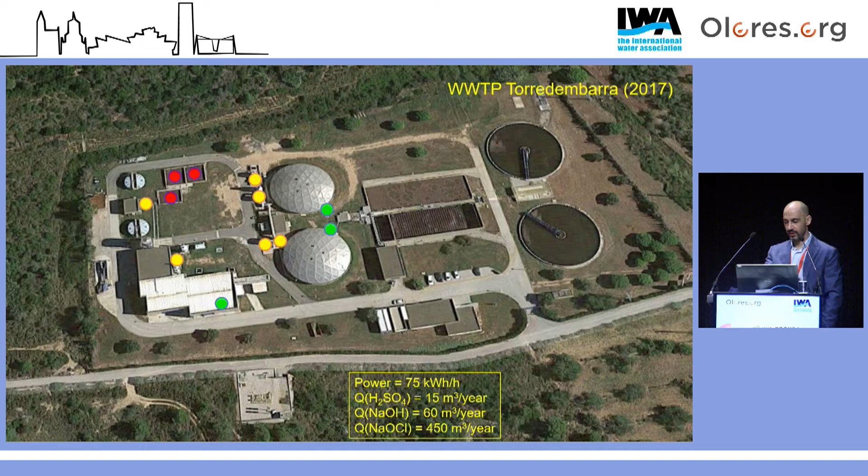And the consumption of chemicals was quite high: 15 cubic meters a year of sulfuric acid, around 60 cubic meters a year of caustic, and around 450 cubic meters a year of bleach. So you can imagine that the cost was pretty high. So the operating entity and the Catalan administration contacted Aeris, first of all, to perform an assessment of the situation of the plant.

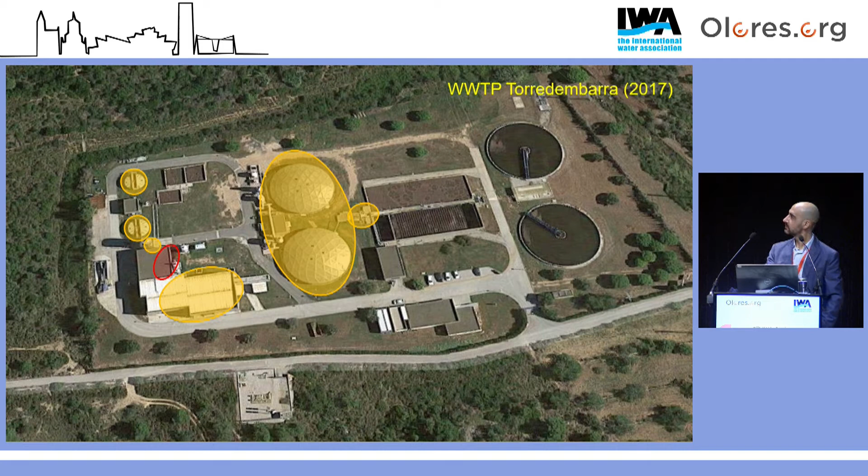First of all, we did a study on which were the main areas in the plant in which odors were produced. And we saw nothing really special here. The main problems were in the pretreatment, in the primary settlers, there on the right, and in the sludge management area, with special emphasis on the dewatering building. So that's when the optimization of the plant begins.

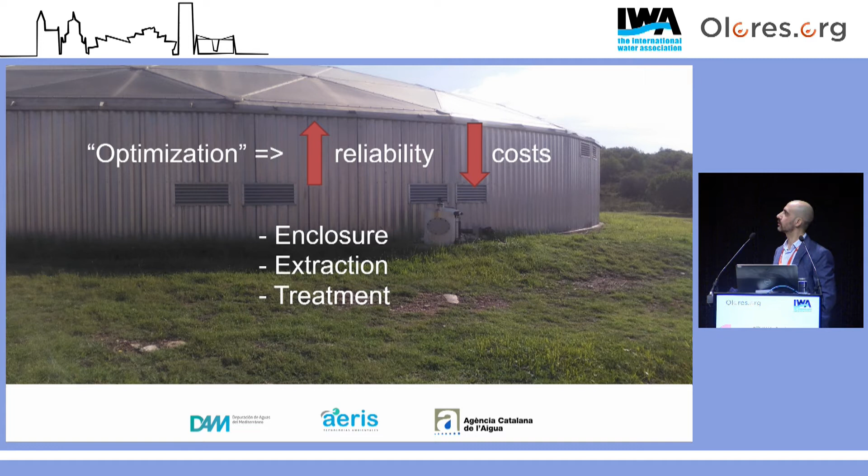Again, the objective of this work was to increase the reliability of the deodorization while at the same time trying to decrease the costs. We did that by acting in 3 different directions: by optimizing the enclosure, the extraction of the foul air, and finally the treatment of the air.

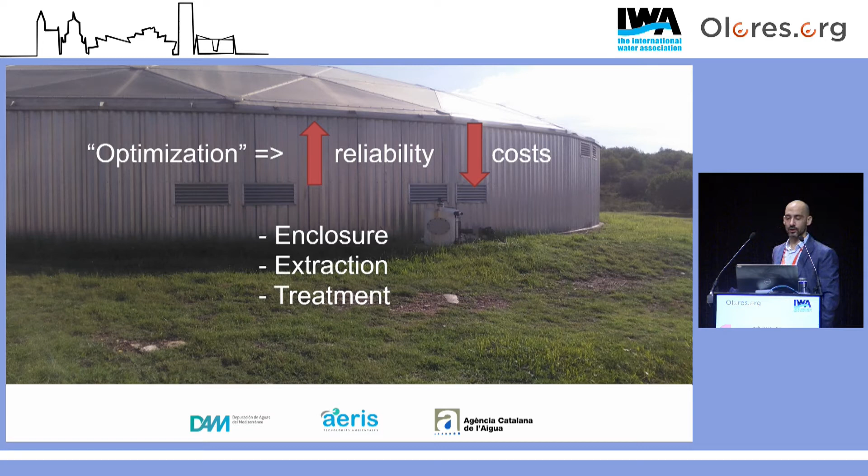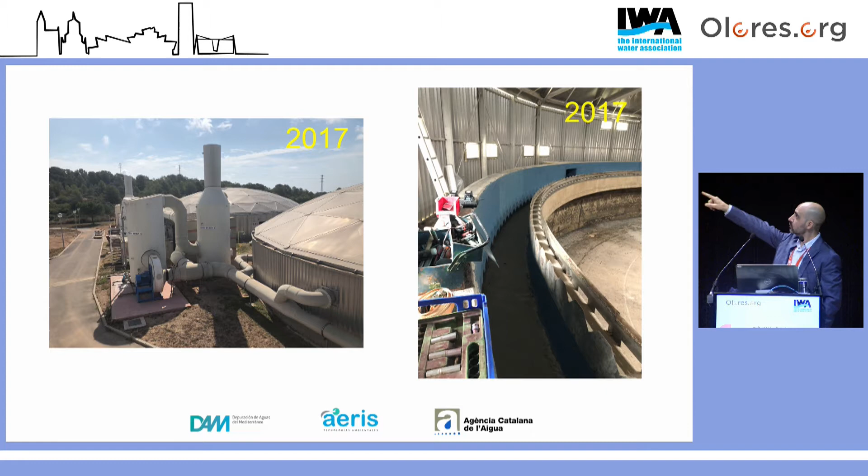First of all, regarding the enclosure of the systems, you can see the situation of the primary settlers before any actuation was done. These were covered by these fancy domes there, really nice, but each of these contained around 3,000 cubic meters of air. So it's a huge amount of air that you need to pump and treat. Also, the outlet ring of the settler was open, exposed.

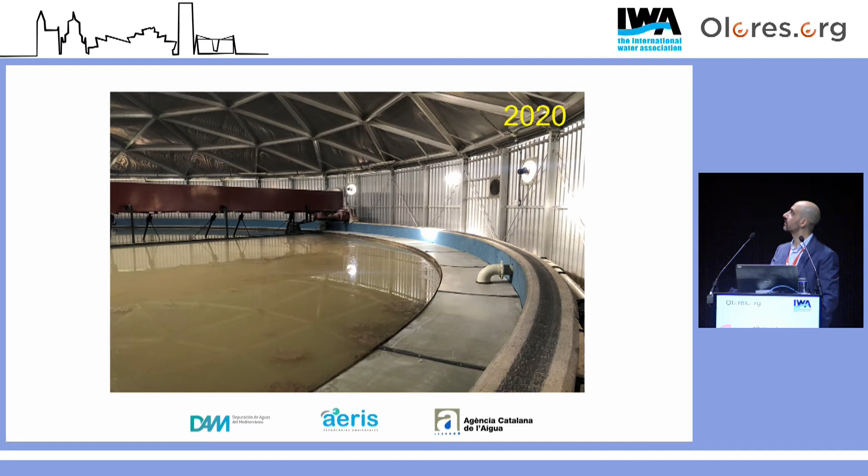So the first thing that was done here was to cover these outlet rings and to include there some extracting fans for the ambient air. Similarly, this is the state of the grit chamber before the actuations. You can see that it was open, and these were closed.

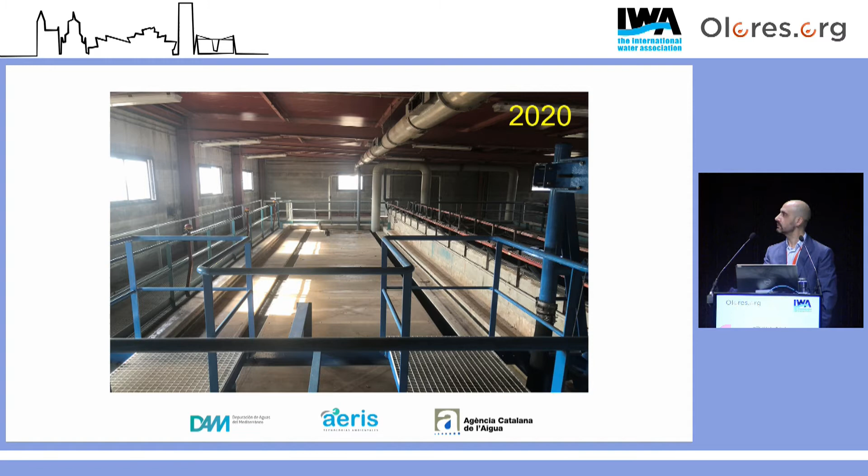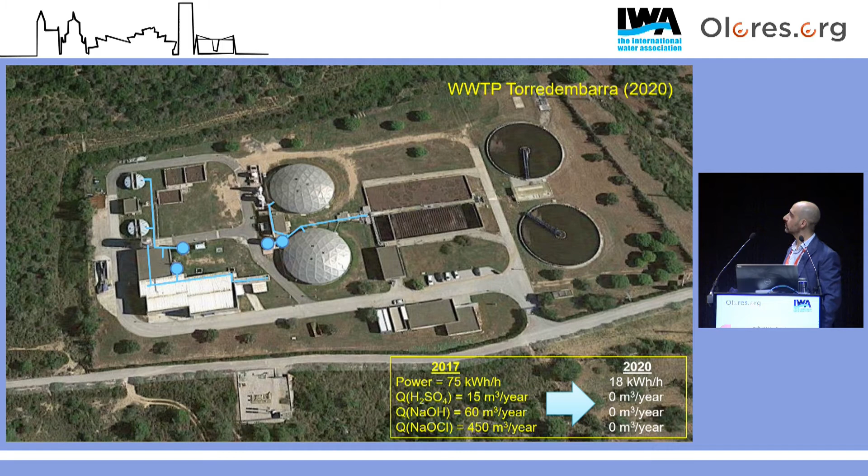So, the actions that were made here led to a decrease in the power consumption around 4-fold, and no more chemicals needed to be used. And now I will tell you about what we did on each of these areas. This is area 1, giving service to the dewatering building and to the thickeners.

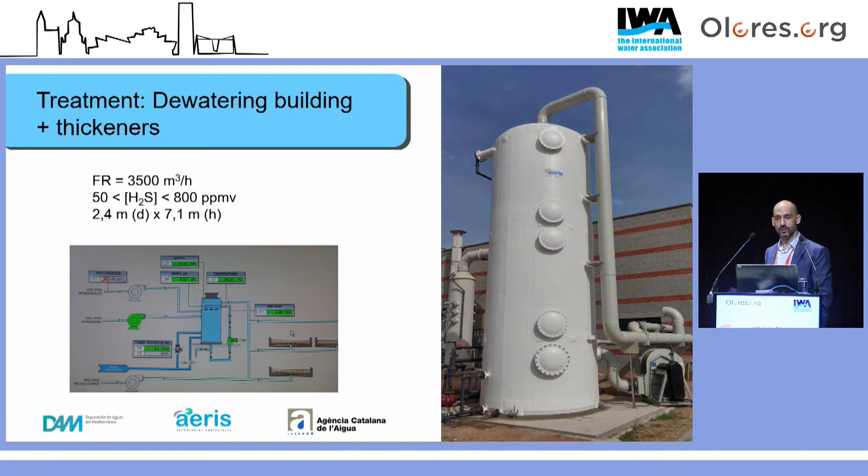Here what we did was to design and to implement a biotrickling filter for treating around 3,500 cubic meters an hour of foul air, which had a very variable but also very high concentration of H2S, reaching up to 800 ppm. So here you can see the results. These are data from this same summer. We're seeing 4 months of operation of the system.

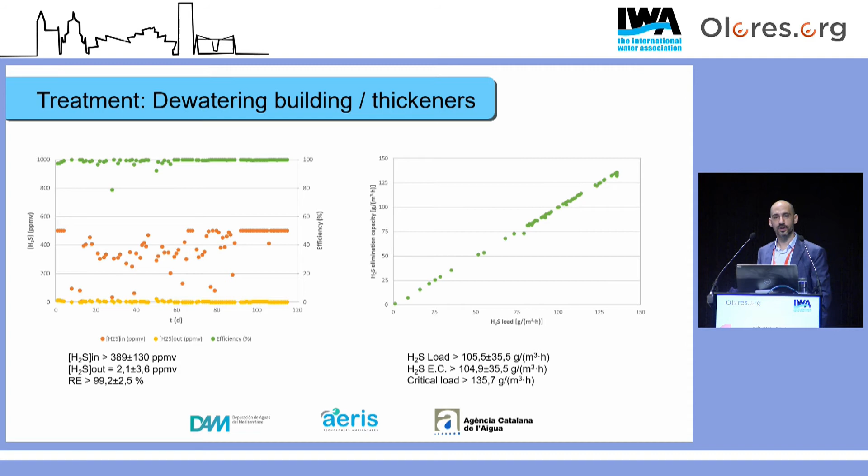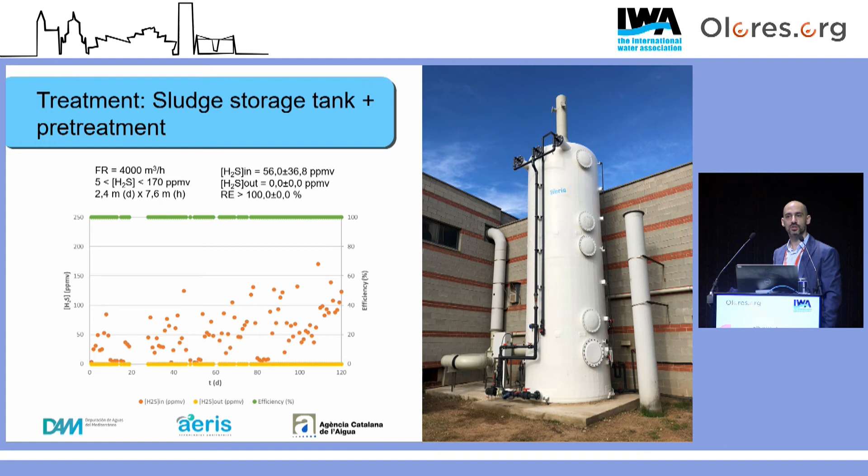So at values as high as 135 grams per cubic meter an hour, we couldn't reach the critical load. So this is pretty good news. So this is area 2, right, covering the sludge storage tank and the pretreatment. The same approach was followed here. So we had a very similar flow rate, 4,000 cubic meters an hour, lower inlet H2S concentrations up to 170 ppm, and in this case, the removal efficiency was even higher with average values of 100%. So yeah, this is nice.

And finally, for the remaining area, which was the primary settlers and some distribution tanks prior to the secondary reactors, what we did was to apply this protocol that most of you already know, developed by Professors David Gabriel and Marc Deshusses in 2003, which tells us how to retrofit chemical scrubbers into biotrickling filters. So what we did this last year was to follow that protocol with minor modifications for the treatment of this air.

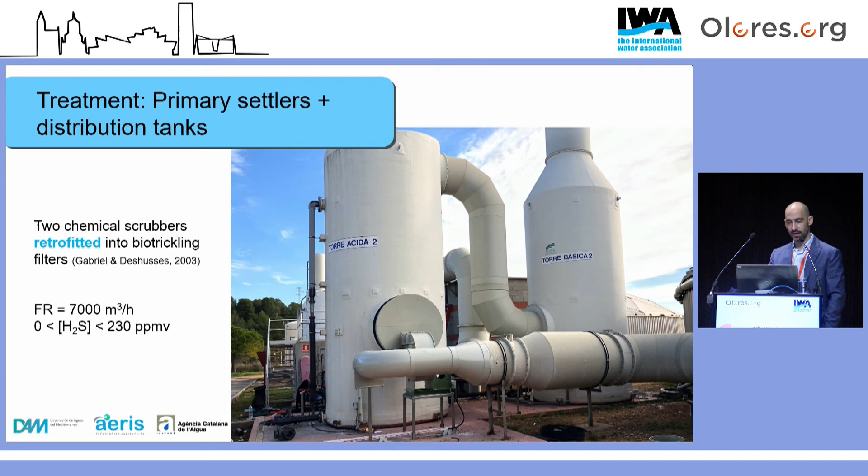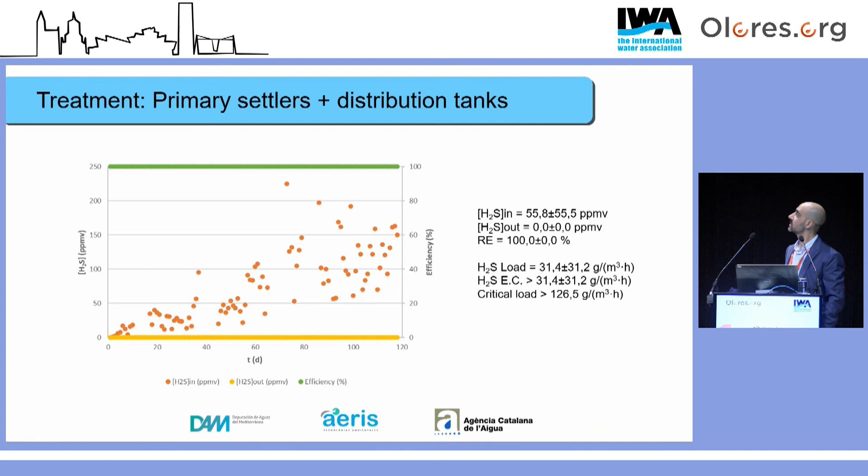So it's 7,000 cubic meters an hour of air containing up to 230 ppm of H2S. And once again, the inlet concentration was quite variable. But the outlet concentration of H2S was consistently 0.0 ppm. So yeah, these are pretty nice results as well. So just a few take-home ideas for you.

First of all, when you want to deodorize a wastewater treatment plant, you need to consider the actions that you're going to undertake integrally. This means considering how to enclose, how to move the air, and also how to treat it. I also would like to tell you that biological technologies have proved to be quite adequate for deodorization in wastewater treatment plants with efficiencies consistently above 99%.

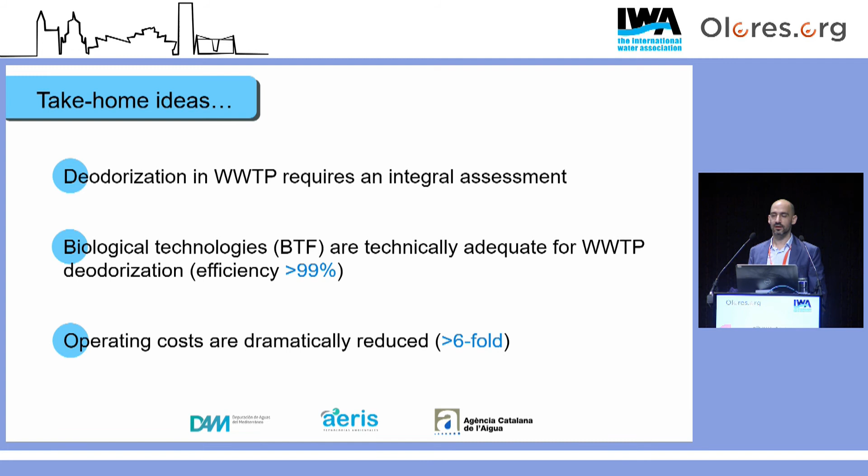And finally, in this case, the operating costs were dramatically reduced around sixfold. The return on investment time for this actuation was around 1.5 years, and no citizen complaints have been found afterwards. So, this is pretty much it from my side.